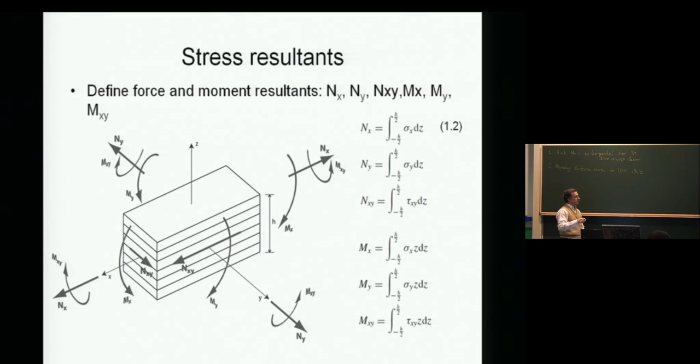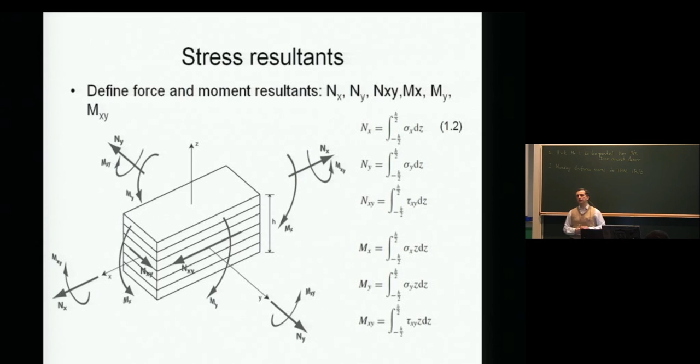So we have the so-called stress resultants, which are the 3 forces per unit width, x, y, and xy being the shear force, and then the 3 moments per unit width. The sign convention is as shown here, and that's the one everybody should please try to be using.

With this in mind, to reinforce a direct and obvious relationship: if I have a certain force, this is units of force now applied, and I divide that force by the cross-sectional area, width times h, the height, I get obviously the average applied stress. And this average applied stress is then, by definition, 1 over the thickness times the integral of the actual point-wise stress.

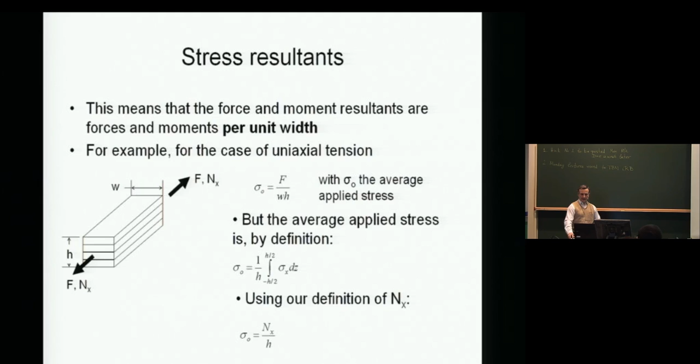And because this, we just said, is the Nx force per unit width, we can then arrive at this relationship, which, even though obvious, many people tend to forget, and it can be quite useful many times. So we then said, okay, we have this equation 1.1 that we introduced, and I will show that again in just a second.

And we also introduced the mid-plane strains, 2 normal strains and 1 shear strain, at the mid-plane of the laminate that we are dealing with. And we said if we take this equation 1.1, so let me fly back, which is here, this equation 1.1 relates stresses in the coordinate system 1, 2, which is not necessarily aligned with the fibers in any ply, to strains in the same coordinate system through these coefficients that we defined and even calculated a little bit last time.

So if I take, let's say, the first one, and I integrate through the thickness, I will arrive at the relationship shown here at the bottom, where Nx, because that's the integral of the stress through the thickness, relates to the three strains via three elastic properties, which are three entries in the so-called A matrix, and they are membrane properties because they refer only to in-plane performance of the structure.

If I have an applied force, I get, in general, three strains in my laminate. If I have an applied strain or three strains applied, I end up with in-plane forces. One important characteristic for a composite, notice the presence of this term.

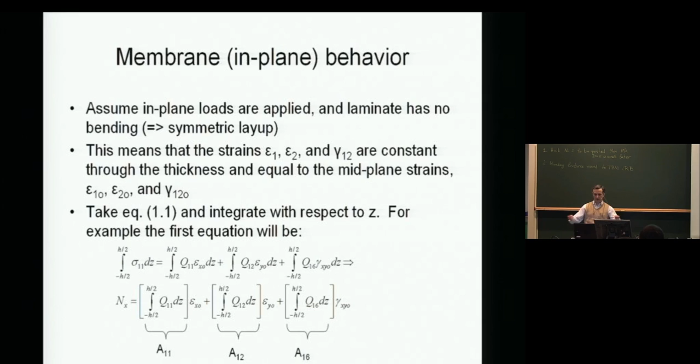So if I did it for the other two equations relating stresses and strains, I would get two more equations that in matrix form gives us the so-called membrane behavior, where the in-plane forces are related to the in-plane strains. And the A's are given as integrals of these QIJs, the QIJs being the stiffnesses.

And because through the thickness each of the QIJ is constant, I can replace the integration with summation throughout all plies, as long as I calculate correctly the integral dz, which is just the z coordinate at the top of the ply in question, which is the kth ply, minus the z coordinate at the bottom of that ply.

What that means, to repeat and reinforce a little bit, is that if I have a laminate, if I define z equals 0 here, let's say, that becomes now my z0, and as I integrate through the thickness, I can determine the coordinates for each ply. I will have a zk at the top and a zk minus 1 at the bottom of each ply, which are the coordinates with respect to my origin. And that gives me every single term in the A matrix.

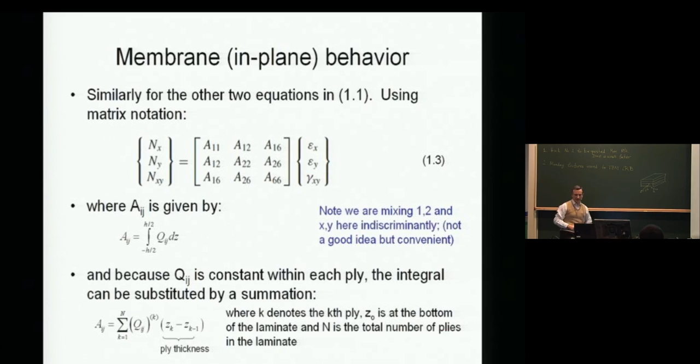That's the end of last lecture. Just to recap and also to create an analogy with what we're about to say now, which is the bending behavior or out-of-plane behavior. Now, in general, for any structure that we will be dealing with, it suffices to assume that the strains through the thickness are linear.

Basically, they consist of a constant term which represents the strain in the midplane and a linear distribution of strain, linear being in z, z being the out-of-plane coordinate, and the constant of proportionality here happens to be the 1 over the radius of curvature. That's just standard mechanics for basic plane stress type of deformation out of plane.

So this is the general case where I can have both stretching and bending, and just to simplify things, let's say I only have pure bending. Pure bending means that there's no stretching. Remember our Bernoulli-Euler beam types of assumptions. If I have no stretching of the midplane, then the three midplane strains are 0.

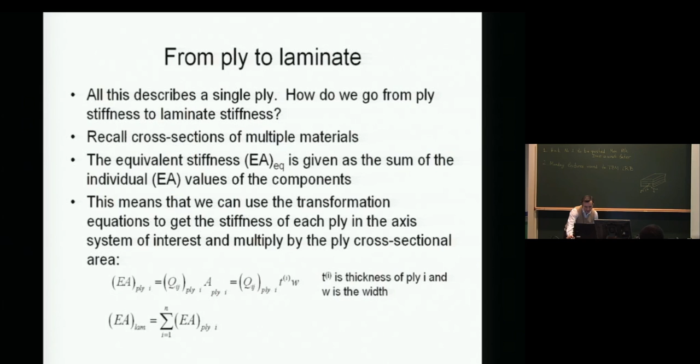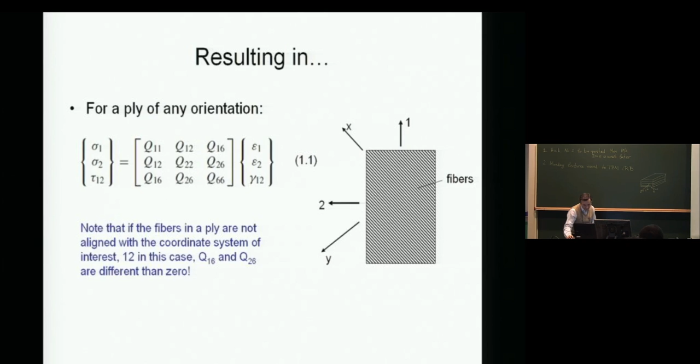And by integrating now, again, those equations, so I'm flying back, see how fast I can find it. So these equations are still valid, but now we will replace the strain with its linear dependence, and we will integrate this relationship through the thickness, provided we multiply by z also. It appears arbitrarily we multiply with things, but the only reason we do this is because we want to refer everything to the force resultants nx, ny, nxy, and the moment resultants.

So this is the mx by definition, and in the general case when we have the epsilon x, the epsilon y, and the gamma, the kappa x, kappa y, and the kappa xy, we will generate the general relationship which involves q11, q12, q16. The 2 here comes from the fact that our curvature relationship here for this twisting strain involves this factor of 2.

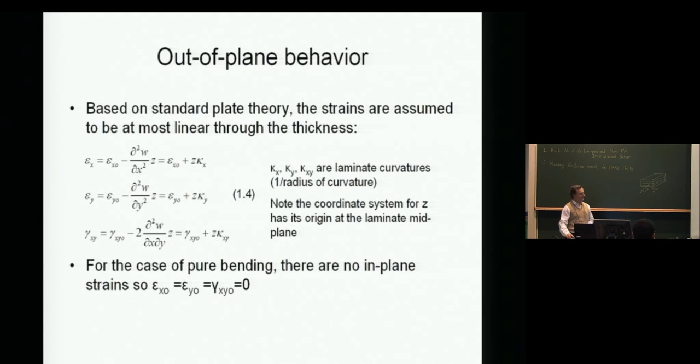So I can then, for pure bending, say that the curvature, the radius of curvature, which is essentially this second derivative, is 1 over the radius of curvature in the x, and then 1 over the radius of curvature in the y direction, and then this one is a weird combined radius of curvature that I have no feel physically what it is, but it's there. The bottom line is those will be constant for pure bending, because we're saying that basically the radius of curvature is locally constant. That means I can take them out of the integrals.

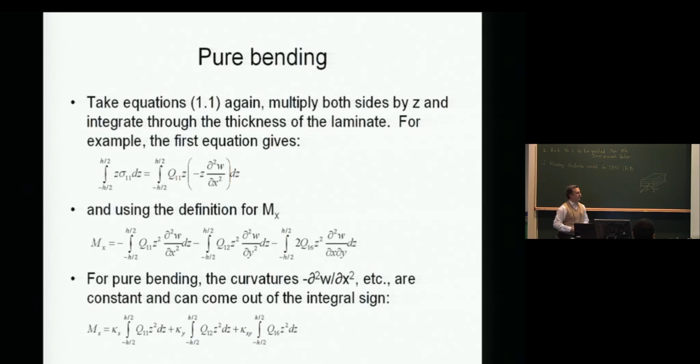So this second derivative here becomes a kappa x with a minus sign, it's lumped in here, kappa y here and kappa xy, and I'm left with these integrals, which again, same way we did for the in-plane behavior, can be integrated throughout the thickness, and because throughout the thickness each of the q's, which are stiffnesses, are constant, we can make them into summations, and the z dependence becomes this integration of z squared, shown here at the top right, which becomes z cubed at the top surface minus z cubed at the bottom surface.

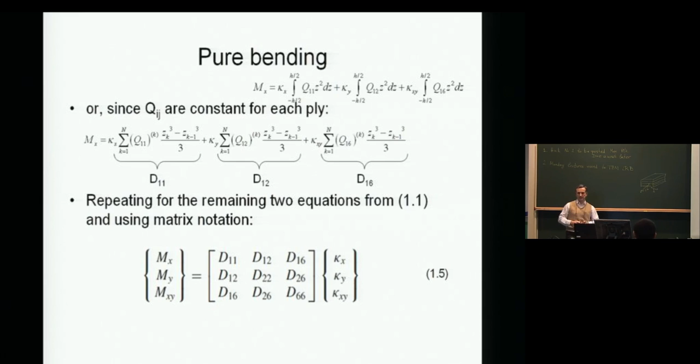So we can then call these conveniently D11, D12, D16, and therefore in general, if we only have pure bending, the moments per unit width are related to those curvatures, or kappa x, kappa y, and kappa xy through this matrix. And you might wonder why all of a sudden we started with A and we jumped to D. There's a B, but there's no C, for reasons that I hopefully will remember to tell you in just a second.

As if this were not enough, composites exhibit coupling in general. Basically, you can have in-plane load, and as we said, you can have shearing as a result of it, which is a mild case of coupling, stretching-shearing coupling. What makes things worse is you can have an in-plane load and generate an out-of-plane bending, or can have a pure bending moment applied and generate in-plane loads.

And the way to see that is, again, if we go back to this same equation that relates stresses to strains, but now include the in-plane and the out-of-plane dependence, and we integrate with respect to z directly instead of multiplying by z and integrating. So we take the basic relationship, integrate with respect to z, which means this integral of sigma x will become our Nx, the force in the x direction of the laminate. And then the Q11 integration will become the A11 we saw just a little while ago, the A12 and the A16, which are lumped here.

And then the remaining are new quantities, which are now the Q's times the integral of z dz instead of Q times the integral of z squared dz or Q dz. So this new integral is now our B matrix, so that's where the B comes from. And we have, as a result, the coupling matrix that tells us by how much the structure would bend if we were applying an in-plane load, assuming it's a composite structure. And therefore, we have the overall relationships.

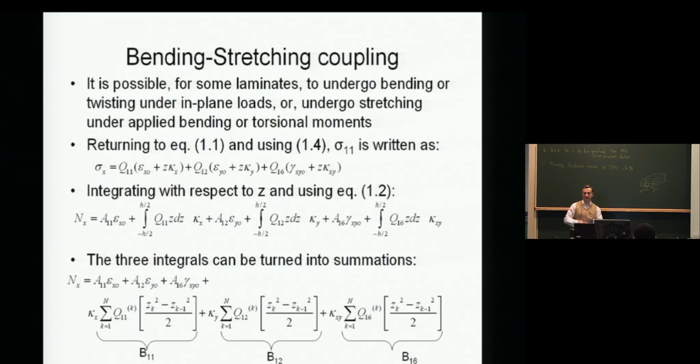That's one case. The other case is the terms that relate in-plane load with a shear strain or in-plane shear with an axial strain. Those A16 and A26 are 0 if for each plus theta, which can be anywhere in the stacking sequence, there is a minus theta anywhere in the stacking sequence. They don't have to be next to each other. They don't have to be in symmetric locations. As long as for every plus theta you have a minus, you are fine. As a result, A16, A26 is 0, which means you cannot couple the in-plane stretching behavior with the shearing behavior.

Now, as a nice add-on, if you look at my D matrix, the D16 and D26 terms couple torsion or twisting with bending. So if I have pure bending, the structure will also twist, or if I have pure twisting, the structure also bends. For this coupling not to be present, we need D16 and D26 equal 0. So can anybody tell me, from previous knowledge or very quick thinking, what types of laminates have D16 equals D26 equals 0?

Gentleman there? Okay, I'll give you that. Good. Any other case? Okay, that's also true. Excellent. Now, suppose you have some plus thetas and minus thetas. Can you create a laminate? Everything you said is perfectly correct. There's one more general case. That they are antisymmetric to the midplane. So on top you have plus theta and below minus theta.

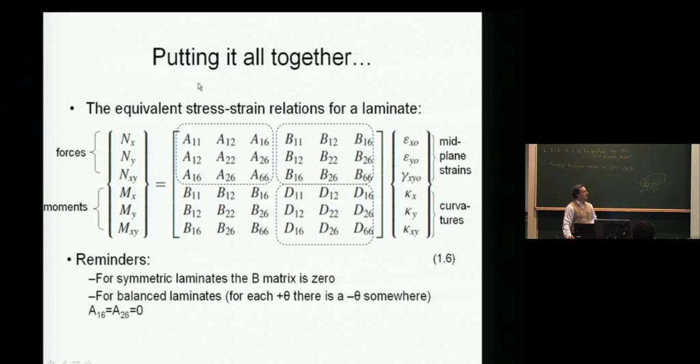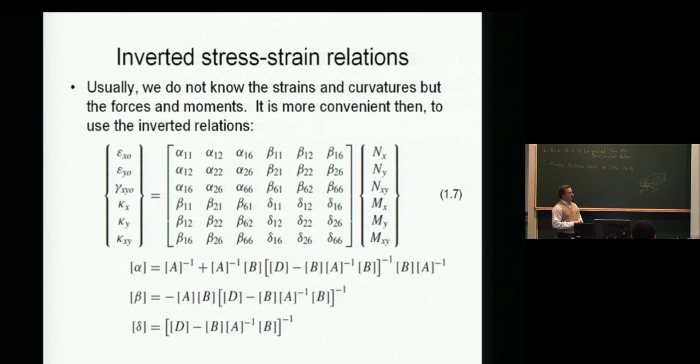Now, in general, we are not given the strains, but we are given applied loads. The relationship we had before related forces to strains and curvatures, and that's not the most convenient way. This is much more convenient because typically we're given forces and moments, and we need to calculate strains and curvatures, which is very useful for calculating failure eventually. So all you do is go back to your linear algebra, take this huge matrix, and invert it.

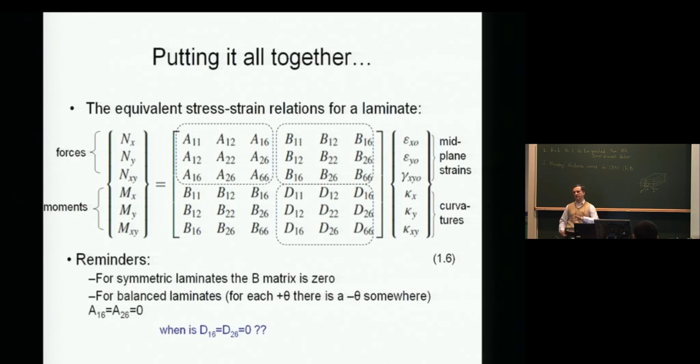Or you ask MATLAB to do it, and I invite you to try that with a good size laminate, not 0/90, but something complicated. In most cases, it can't invert it. Not that it's not doable, it's just that numerically it becomes quite difficult. I've had a student doing that in general, and it was a nightmare. And of course, you can use symbolic manipulation to do it. In Maple, it's a 6x6 matrix; you get 60 pages for each term. It turns